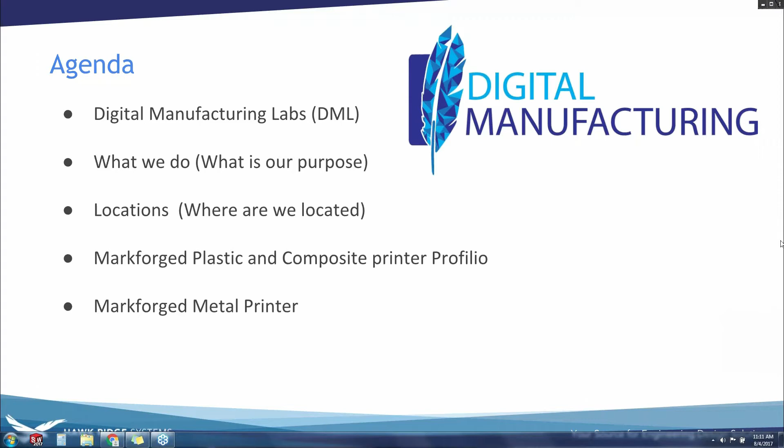Our first DML was established in 2014. It's in Santa Clara, about 4,000 square feet. The goal is to offer more than just software — the goal is to offer software and hardware and just to meet people's needs.

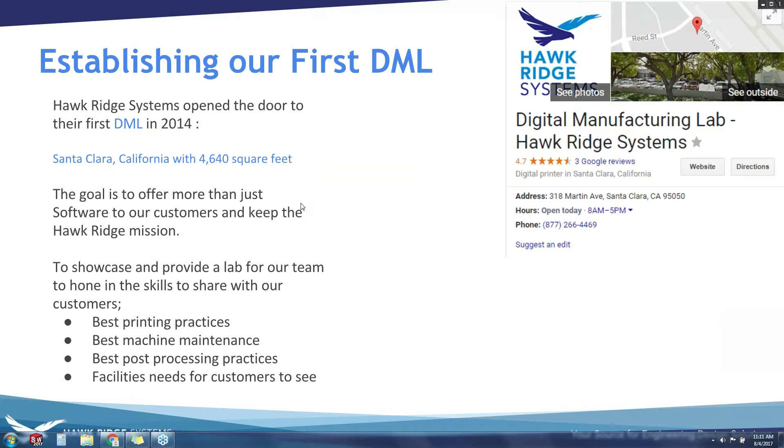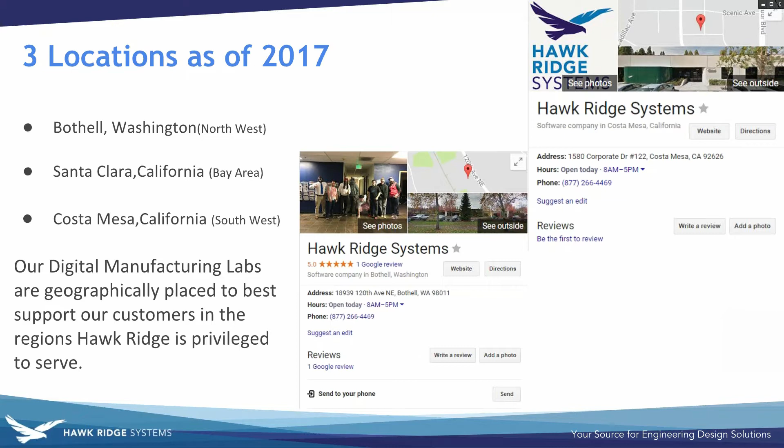Recently, we've also opened up 2 more locations, one in Bothell, Washington, and one down in Costa Mesa. This is just to better serve our clients.

So this year has been a very exciting year. What we can do now is we can actually offer new printers — this year we took on both Markforged and HP. This just gives us more printers, brings better opportunities to our customers, better ways to serve you guys.

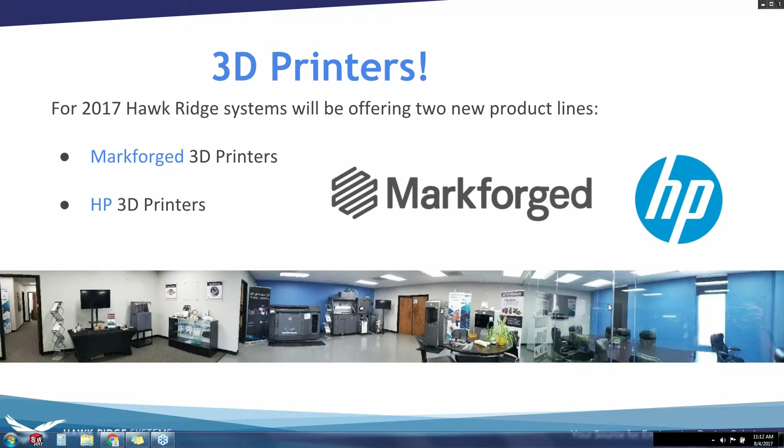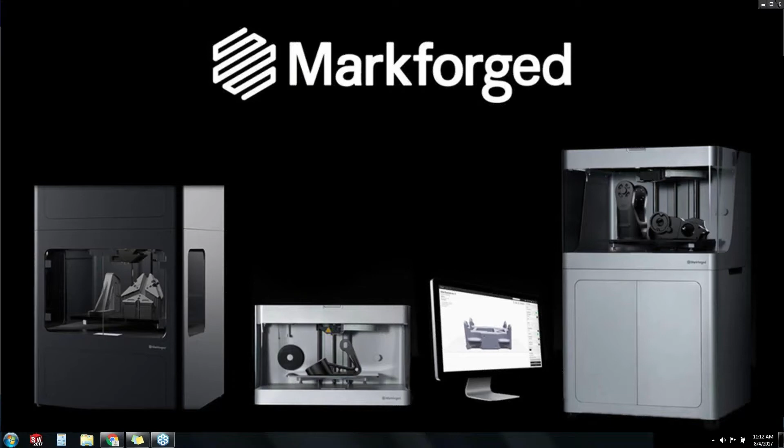So jumping into Markforged here. First we'll do a little bit of a history about Markforged.

So Markforged, the company founder, he was a MIT engineer. He is also very into motorcycle racing, so you'll notice some of the products he prints are motorcycle levers and stuff. He is from Cambridge, Massachusetts. His first printer came out in about 2014, and he used to be a machinist.

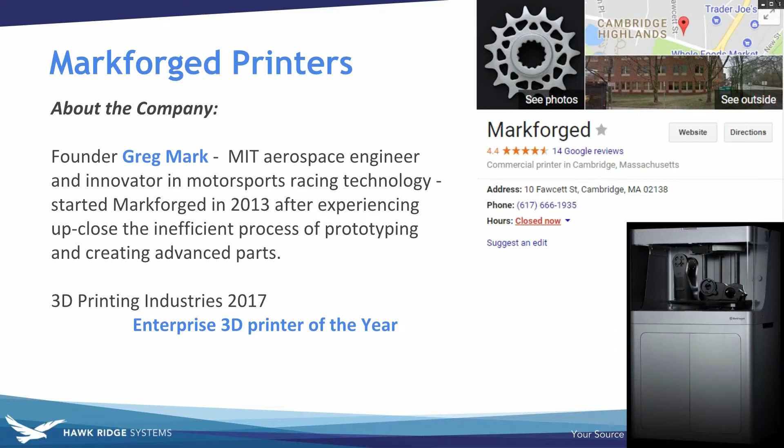So the first Markforged printer, in 2014, was actually launched at SolidWorks World, and what makes it unique is it could actually inlay carbon fiber. I'm going to be talking a lot about carbon fiber and trying to better show you the strength and how to quantify how much stronger these 3D printed parts are than typical 3D printed parts you get, or just injection molded plastic ABS parts.

In 2016, they introduced the Mark II, and then the Mark X in 2017 — 2 more printers, an Onyx Pro — and we're very excited that sometime later this year, the Metal X will be released. The Metal X will be the first metal printer that Markforged makes.

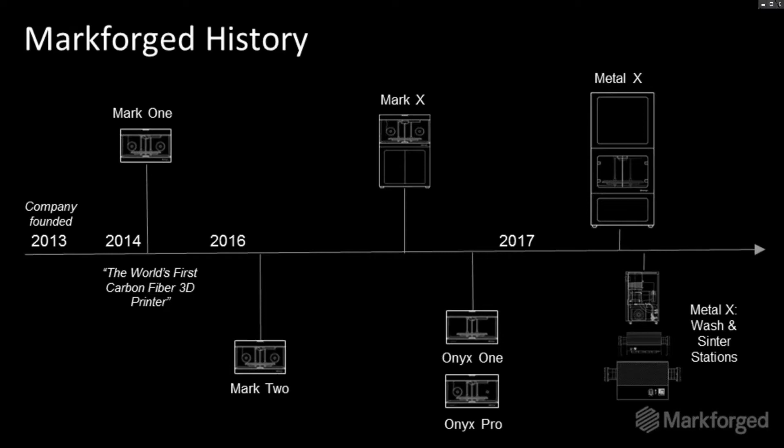So what this allows you to do is bring a better part at lower cost to the market faster. For prototyping too, it allows you to make mistakes faster. As an engineer or industrial designer, we all know we're going to make mistakes — the goal is to make them as quick as possible before we go to production. And so that's what these parts can do.

And with Markforged, we're no longer limited to just prototyping parts — these can be used as end-use parts, which is really, really exciting.

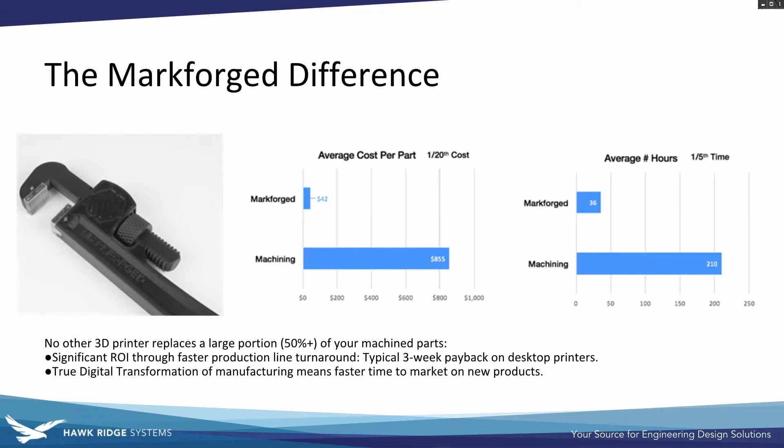So some of the differences between other competitors is, one, the ease of use. The unified cloud software that I'm going to show you later on in this webinar is terribly easy to use. It doesn't need to be installed on your computer — you just need to log on. You can see all of your files that you have ever printed. You can reprint them. You can reprint builds. You can share and add other people to your printing group.

So if your company is sharing 4 printers in the fleet, you can give access to different engineers, designers, and management, and they can all see what's printing, what has been printed, and different files that have been loaded. You can get print times, all very easily on the cloud. And it's not something that takes a long time to learn — this is about a day or so, and then you click through every single option, and you'll feel good and confident using the software.

The other really nice thing is just the precision and the quality of the parts. If you guys have ever used traditional FDM printers, you know the frustration of having to hit print and doing a prayer that the next day when you come in, it's finished — not just spaghetti. Well, with the Markforged printers, that's totally different.

You can have confidence that your part will be done and be done well when it's done printing. That's a big deal. It doesn't sound sexy, but it's really important. When you have a deadline, reliability is awesome.

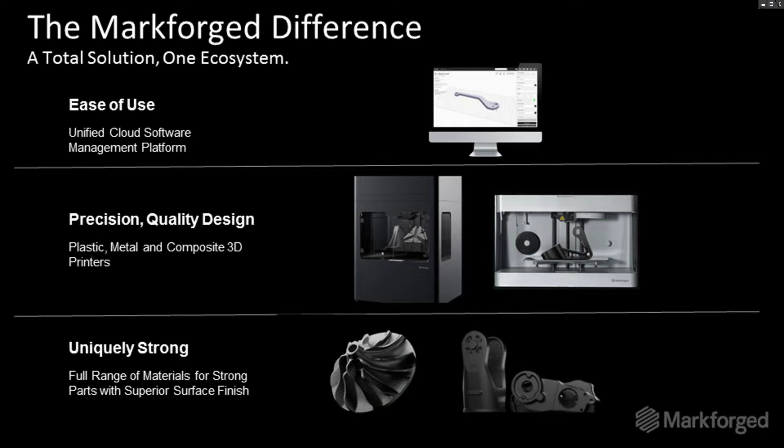And then, of course, now we're getting strong parts, and I'll have a lot of graphs to prove that they're strong. This is no longer just a visual model. This is a strong part that you can test with.

And then they've actually got a lot of awards for their great products. So it isn't just a product that was released and no one said anything about it. People have noticed what a great product this is. This is one of the first desktop printers that lives up to the hype and the dream of getting reliable prints off of a desktop printer. Before, not a lot of printers have been able to deliver on that promise or expectation, and Markforged is one of the companies that is doing this.

And here are some examples of what it's great for. I don't want to put any printer in a box and say this is only what it can do, but these are just some examples to get you excited and make you think outside the box. Tooling and fixtures is huge for Markforged. Many companies have found that instead of having to CNC out a tool or fixture, they can just 3D print that fixture on the printer so the CNC can keep running and cutting metal and making money, while the 3D printer is printing the cheap, easy fixtures.

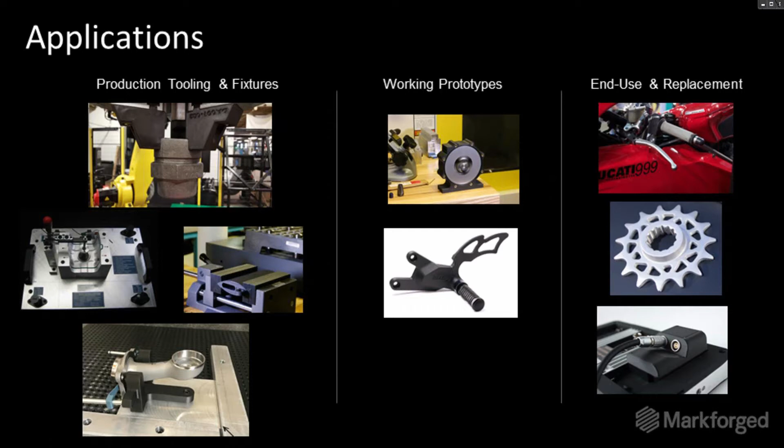Okay, so the lineup that Hawk Ridge is selling, these are the printers that we are selling. First is the desktop printer for anyone at any small company, even if you're just a home user. The Mark Two is the one that we'd like to talk about and bring to you. This is a prosumer printer, meaning the quality is wonderful, the prints are reliable, but it's affordable and you can put it on your desktop.

It's great for that. The next printer we'll talk about is the Mark X. This is when we jump up into the professional series printers. This one is made to be run more, has bigger build volume, has inspection, has all the carbon fiber materials. It's just for professionals. And then very, very soon, we're going to have the Metal X. This is for production, for making end-use parts. This is metal, and we're very excited for that one.

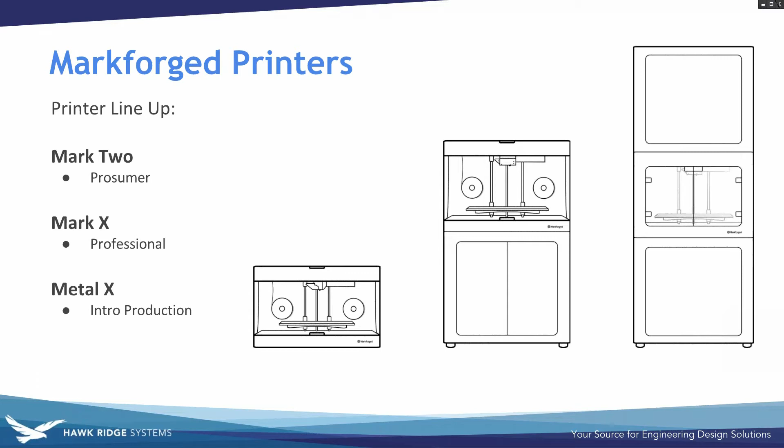Okay, plastic and composites. This section is all about the plastic and composite printers, the first two I talked about. All right, so this is one of many graphs that I'm going to show you. So what are we looking at here? We're looking at the strength of some different materials.

The first one is nylon, and we can see that it's not as strong as ABS. And then onyx. What the heck is onyx? Onyx is the material that Markforged prints with, that's their base material. Every plastic printer that Markforged prints is usually with onyx, sometimes they inlay carbon fiber or different material inside of it, but onyx is always going to be the outside material. And if we look at this graph, we know that it's stronger than ABS and it's stronger than nylon. So even if you're just printing with a base material, you know that you get a stable, strong material.

And how does it achieve this? It actually has chopped up carbon fiber strands within the onyx material. What's great about that is it reduces the amount of warping. If you've ever printed with ABS or nylon, one of the things you know is there's a high potential for long, flat things to warp, because of how much it changes shape when it expands and contracts. The onyx, because it has that chopped up carbon fiber, doesn't expand and contract as much, so it holds its strength a lot better. That gives you better looking parts, more reliable prints, and it's just a superior material.

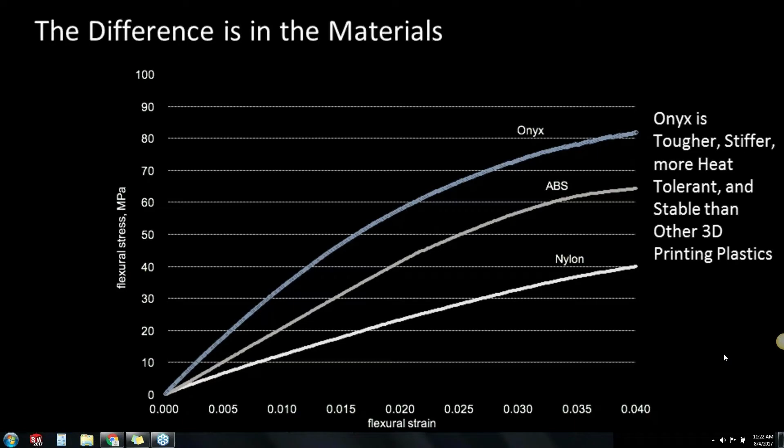Next graph. The other thing Markforged is known for is being able to put continuous fibers within the part. What does this mean? It means you can have an onyx part, and if it's big enough, you can inlay continuous strands of carbon fiber or fiberglass inside it.

Over here we have a picture of the actual part, and this would be a picture if we cut it in half so we could see the layers. You can actually see layers of the carbon fiber going across. This is a digital representation: the white lines represent the onyx material inside and around, and the blue lines represent the inlaid material, either carbon fiber, Kevlar, or fiberglass. So you can inlay different materials within your part, and that adds to the strength and makes it quite a bit stronger.

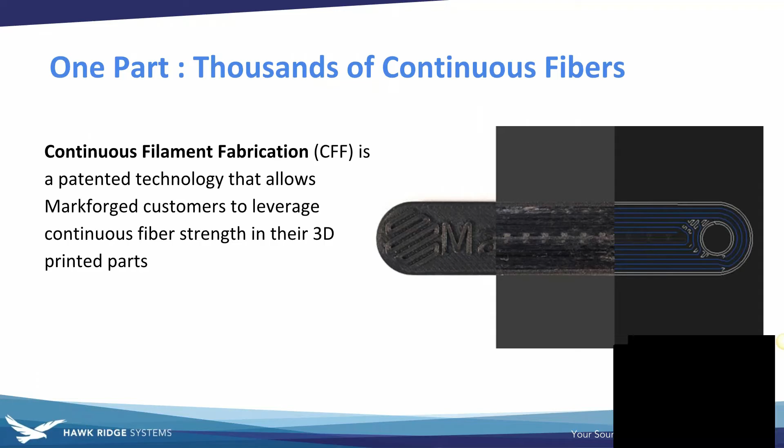How much stronger? Here's another graph that shows its strength. If you inlay with Kevlar, you can see the strength, and what's nice is it doesn't fail in a dramatic fashion—it starts to yield and then just goes off slightly. What would this be great for? Something that needs impact resistance. So if you're 3D printing a part for a rough environment that needs some flex but also needs to be strong, Kevlar would be a great choice.

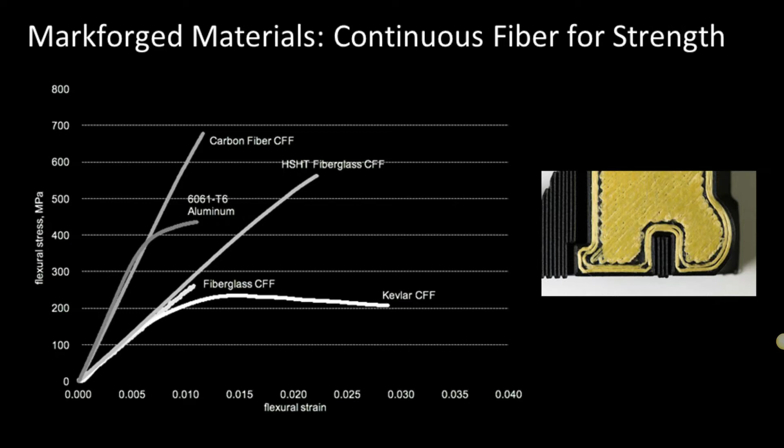But let's say you need something stiffer. You could go to fiberglass, and the CFF is a little bit stronger here. The next one is a high temperature fiberglass. Then we have carbon fiber inlaid, and if you notice, it is very close to the same strength as aluminum. What's amazing is that you can 3D print a part with almost the same strength as aluminum. That hasn't been possible before, and this gives the user a lot of ability to make stronger parts from a material and manufacturing method that didn't exist before. It gives you freedom to make really strong parts that you used to not be able to make.

So this is game changing for 3D printing. Before, we couldn't 3D print parts that were anywhere near this strong. And that means it can open up many different applications for these types of 3D printed parts.

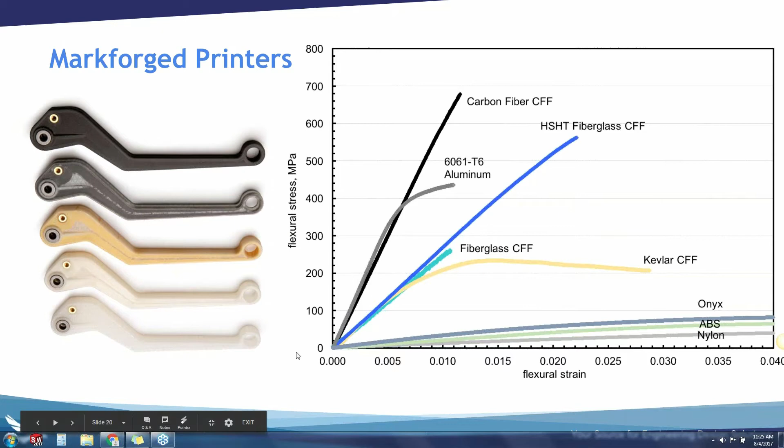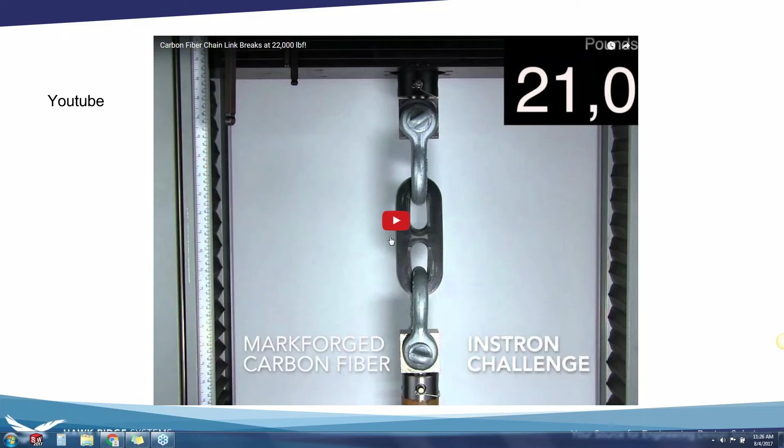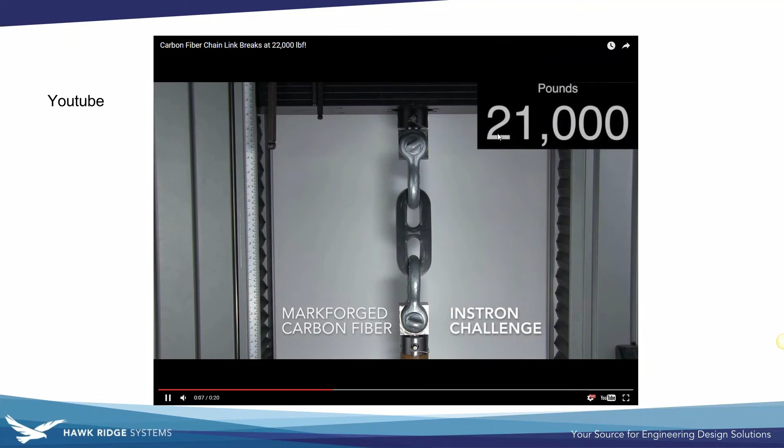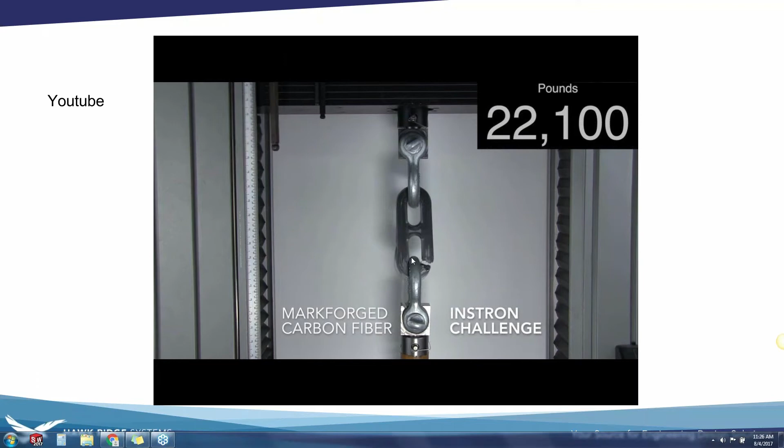Let's see if this actually plays here. The center part is a 3D printed part, and it's going to fail, but they're adding pounds to it, and it fails at about 22,000 pounds—that's how much force it can hold before it actually breaks. That's on a 3D printed part, which is pretty amazing. If we look up here at 21,000, 22,000 pounds, you can start seeing it deform a little bit. This one is inlaid with carbon fiber, and there it breaks, at 22,000 pounds. So that's really exciting—it shows you can make very, very strong parts.

So what type of printers can do this? The Mark II is the first one we're trying to sell here. The Mark II can offer the onyx material—you could just print in onyx, or print onyx with inlaid carbon fiber, inlaid fiberglass, inlaid Kevlar, or inlaid high temperature fiberglass. There's also a nylon option, which would take the place of the onyx material, so your base material could be either onyx or nylon. But again, onyx is a stronger, superior material, so really I don't see anyone using nylon any longer.

The next question is, okay, I like the size of this—it's a desktop printer, plugs into the wall, has Wi-Fi, that's great. How big can I print something? Your build volume is right here: you can print 320 by 132 by 154. That's your build volume.

Its resolution is 100 microns. Very nice, easy to set up, easy to live with, easy to print. It can sit on your desk, and it's reliable, very reliable.

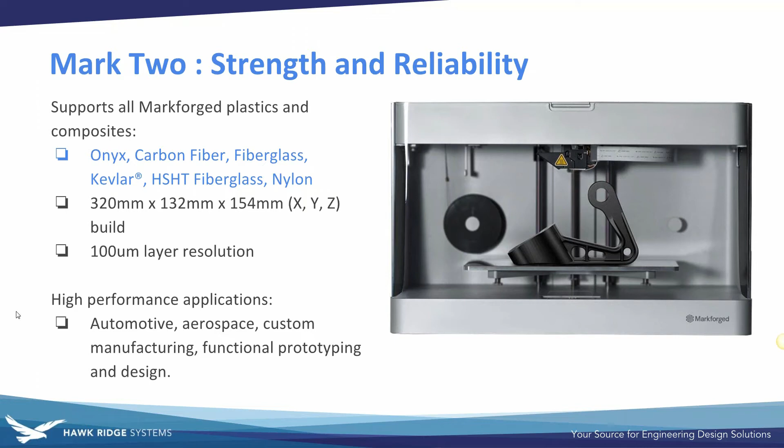The next printer that we sell is called the Mark X. This one is more for the professional user. The other one was that prosumer. This part is 330 by 250 by 200, so you get a much larger build volume, and that's great. A lot of people need to print larger parts.

It can print with all the same materials as the previous printer, the Mark II, but it has some other benefits. One is it prints at 50 microns, so it can print at 100 or 50, giving even finer layers for better resolution. You have this wonderful sheen when the part's finished because of that small resolution.

Now with this printer, it actually has a laser inspection. So what this means is you can set up different layers within the software to actually inspect the part to make sure it's within tolerance. You can say at layer 300, I want to do an inspection, and it'll capture what it's printing at that layer. Pretty unique function, really exciting to see how this is going to be used.

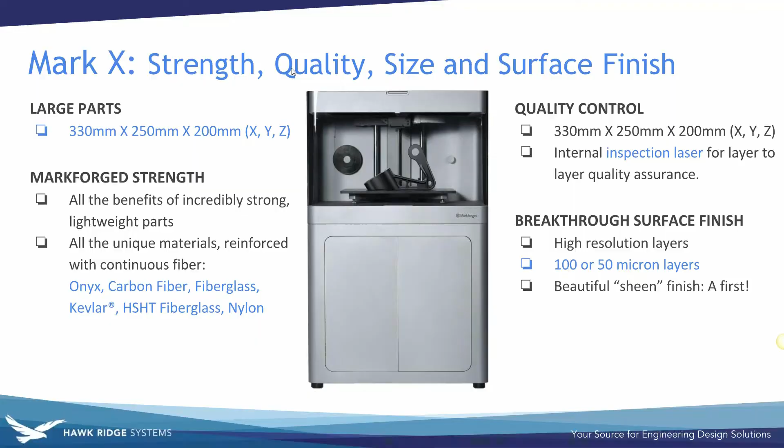It also has a webcam. So at any point, even if this printer is in Chicago, for example, and it's printing, if I have internet connection, I could log into the printer, take a screen cap, and see where it's at, see the print being printed, which is really quite interesting and quite fun to do. So those are the two composite printers that we're selling, the Mark II and the Mark X.

This is usually what everyone cares about, and that's understandable: metal. Metal's not released yet, but Markforged is going to release a metal printer later this year, and it's going to be very exciting.

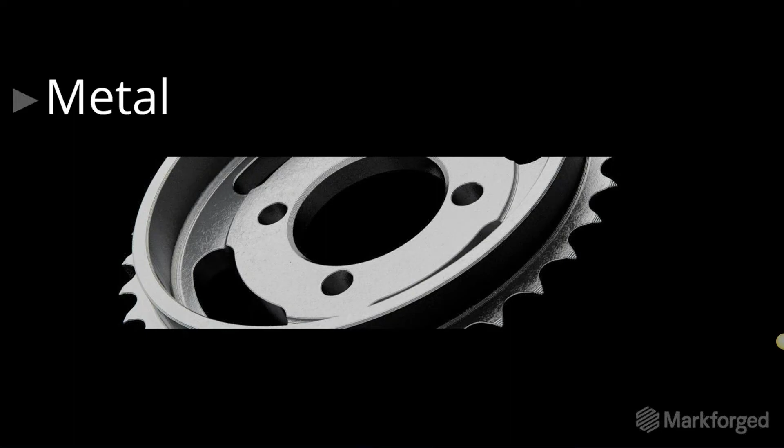This technology is called ADAM, short for Atomic Diffusion Additive Manufacturing. It's different than a lot of other technologies for metal. It doesn't use powdered metal in the traditional sense for 3D printing, and it doesn't have a high-powered laser either.

What it will do is actually print out like an FDM printer, the metal part in a green state, and then you have to put it in a furnace, and it will fuse the part together afterwards. So within the strands that it's printing, there's actually metal within it.

What's amazing about this is it's one of the first affordable solutions for professionals. These are going to start at under $120,000 for the printer, which is about 3 or 4 times cheaper than any other metal printer out there. Most metal printers are about $500,000, and you need things like nitrogen to suck out all the air. You need a huge room. They're messy, with powdered metal that can be dangerous.

So instead of all that, this is a new solution. This printer could actually be in an office or shop area, and you could be metal printing.

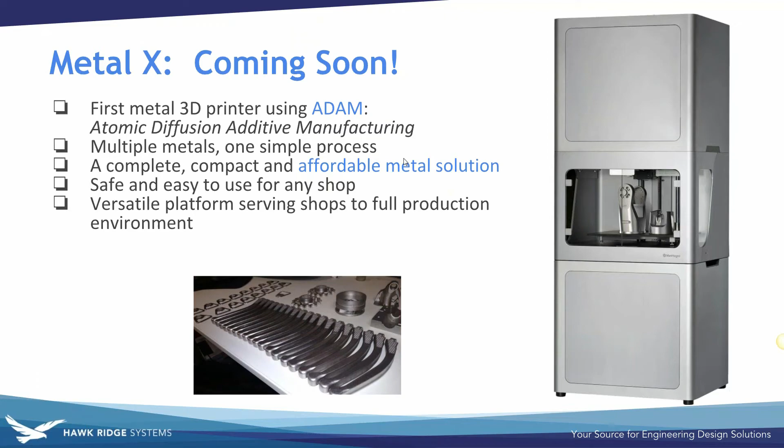Next is some pictures of what it can do. Again, the founder loves motorcycles, so we're going to see a lot of things from motorcycles like the sprocket and this brake lever. But these are dense metal parts that have been 3D printed.

What's amazing about that is that it allows you to make really light parts. You could have a very sparse fill pattern, 50% infill, or 25% infill, so the whole outside is still metal, but it'd still be a very light part.

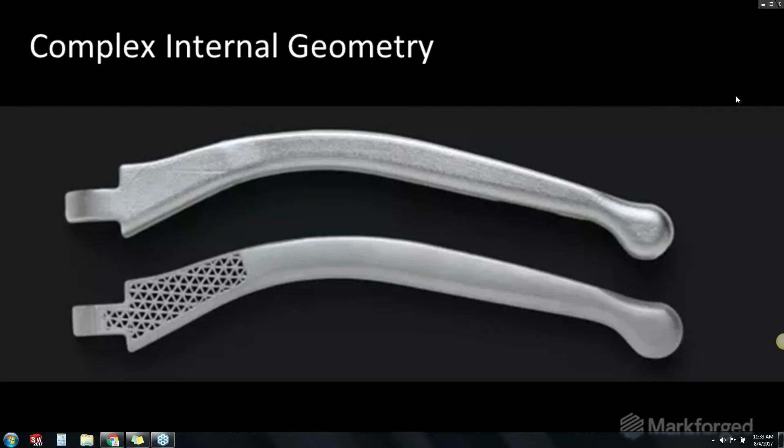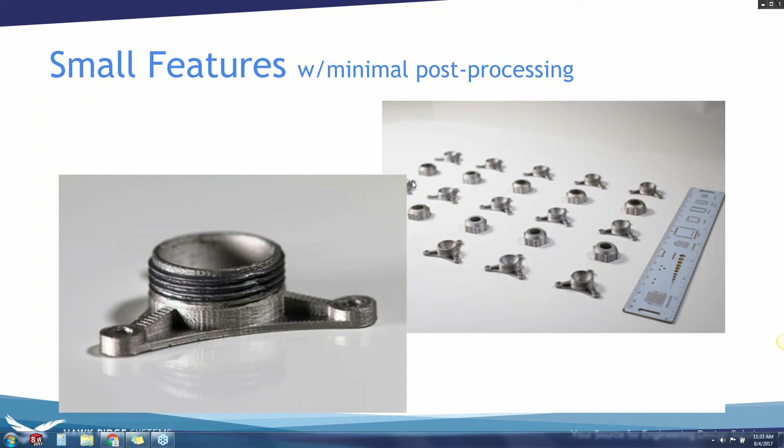To give you an example of how small you can print, these are all 3D metal printed parts. This example here is about an inch in its longest diameter, and it printed these threads. These threads did not need to be tapped afterwards—it was able to print them directly, which shows the accuracy this printer is going to deliver.

That's going to open up a lot of opportunities for different people with metal printing. Now, with metal printing, there is one thing to be aware of: post-processing. When it's done printing, you're going to need a washing station, something you'd put in a shop area, to wash off all the binder from the part, so you're left with just the metal part you want to sinter.

Markforged has also found two different sintering ovens that you could use. You'd buy one or the other based on the volume of parts you want to print and sinter—one for smaller parts, the Sinter-1, or if you're doing much larger parts, the Sinter-2. That's just nice; it gives you more options.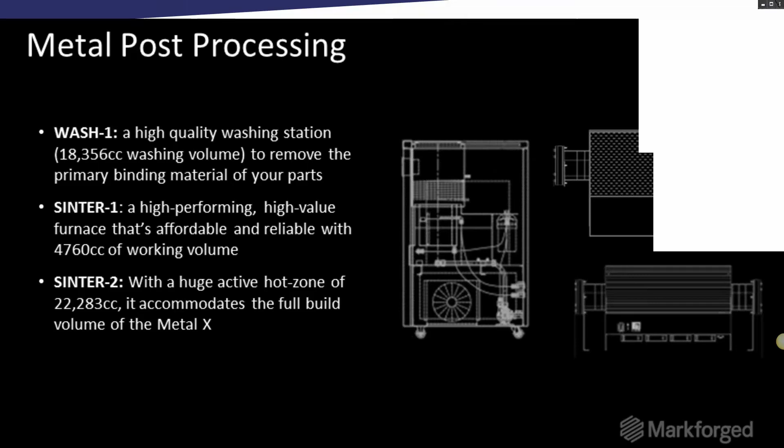And the tech specs—everyone always wants to know about the tech specs. Its build volume is about the same size as the Mark X, so 250 by 220 by 200. It can print down to 50 microns, and it's actually a very light printer, about 150 pounds. In the 3D printing world, metal printers usually run 5,000 to 20,000 pounds, so this is really amazing how light it is. That's going to make it easier to install, easier to move, easier to set up, and easier to ship.

That's all great. And the cartridges are bound powder, so you don't have to worry about powder floating all over. Metal powder is also very dangerous, but you don't have to worry about that—you have bound metal instead, so it shouldn't get messy everywhere.

The other thing to look at here is the materials offered. You have stainless steel—the 17-4 and the 316—both going to be released in the fall when the printer is released. They're also testing other materials coming out later, like aluminum, Inconel, tool steel, and even titanium. So once you get one printer, in the future you'll be able to print all these different materials.

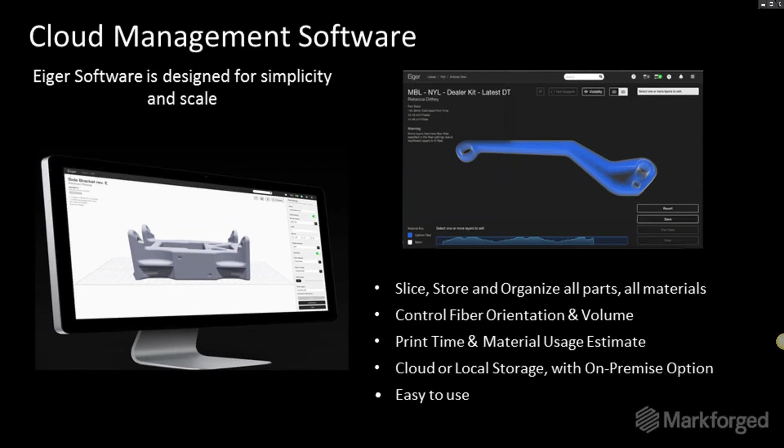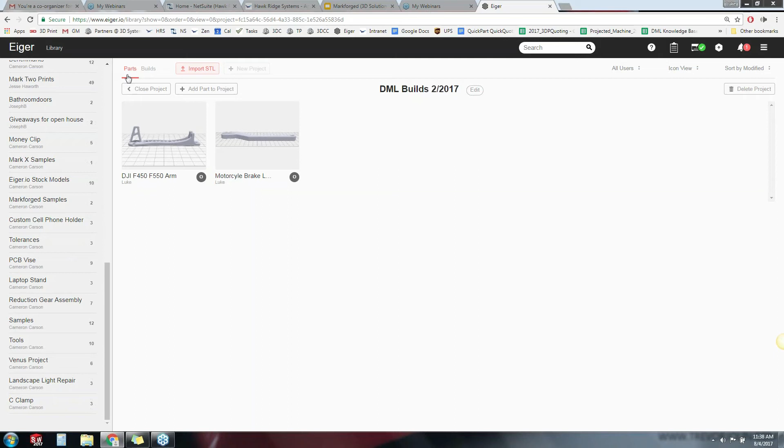Okay, so if I look on the left-hand side, I have different projects I could do—you can make different projects. I also have parts and builds. A part is something you bring in, like an STL. A build is the total build that you're going to print on—that's a build platform. When I click on a part here...

It'll load the part, and this is internet dependent, so if you're like me and trying to run a webinar at the same time, you may have a slight bit of lag depending on your connection. But if you're not doing multiple things at once, it loads up really fast. What can I see here? I can see the name of the part, that it's a clone from another user, and all the different revisions of this part, which is really nice. So if you have a part that's changed multiple times and you need to go back to revision 3 because that one fit better, or later revisions failed, you can revert back to these older revisions.

Very nice thing. Also, if I click here, look at this—this is wonderful. I know how much it's going to cost right now, and I know how much time it's going to take.

And I know the weight of this part. Really nice software - that's all on the left-hand side. On the right-hand side, I can see the name of the part.

I can choose from cloud slicing or desktop slicing. So if your internet speed isn't the fastest, you can switch over to slicing on your computer.

I can choose what printer to print it at. Right now Hawk Ridge has 2 printers hooked up to the internet. I could actually choose to print right now on the Mark Two, which I believe is up north, or I could print in Santa Clara with the Mark X. I'm in a different location, and I could send to these printers.

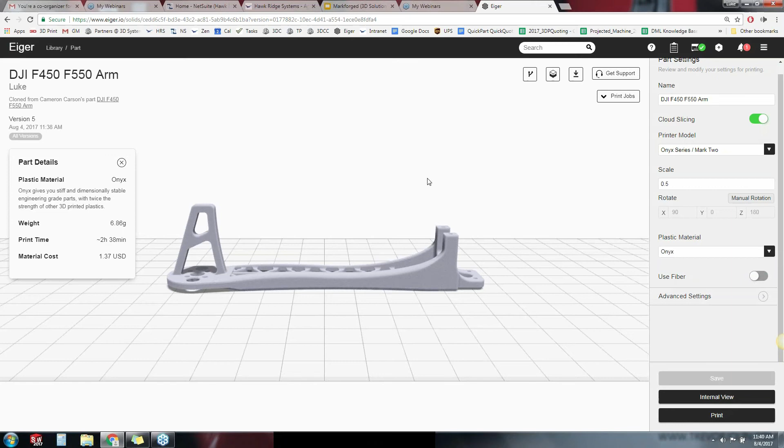Then what's next is I could choose to inlay some fiber. Now the part needs to be big enough, so let's look at this part. If it's not big enough, you can also choose where to print it. You can scale this thing up pretty easily here, so let's make this bigger. That's another nice feature - if it doesn't fit, it'll show you, it'll turn red. So it changes down to 1.2.

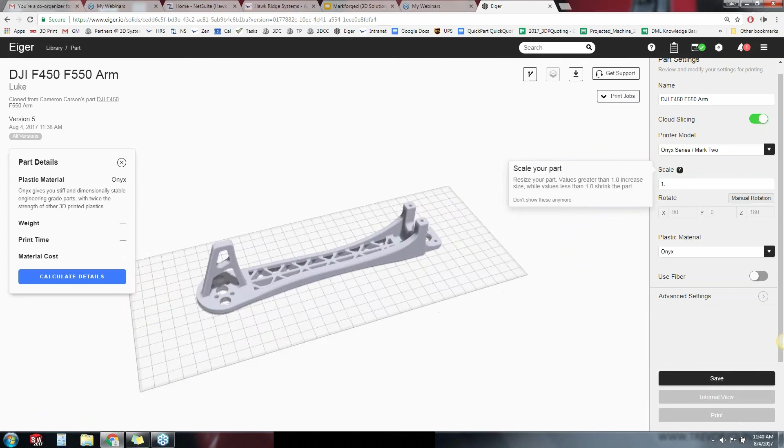Okay, so if I want to put in some fiber, I can add fiber now, and I can choose what type of fiber to inlay - carbon fiber, Kevlar, fiberglass, or that high temperature one. Say I want to do carbon fiber.

I can also choose the layers that I want to add in. With this part, obviously I can't fit 274 layers of carbon fiber. What it'll do is put as many layers as possible.

I can choose if I want isotropic or concentric fibers. It actually gives you this nice preview of the difference between them. And I would actually like concentric fibers.

Walls to reinforce - if I click on this one, you can see all walls, outer or just inner walls. And then concentric rings - how many rings should I have? Maybe I just need a couple, or maybe I want a lot. You can adjust all that, which is really nice.

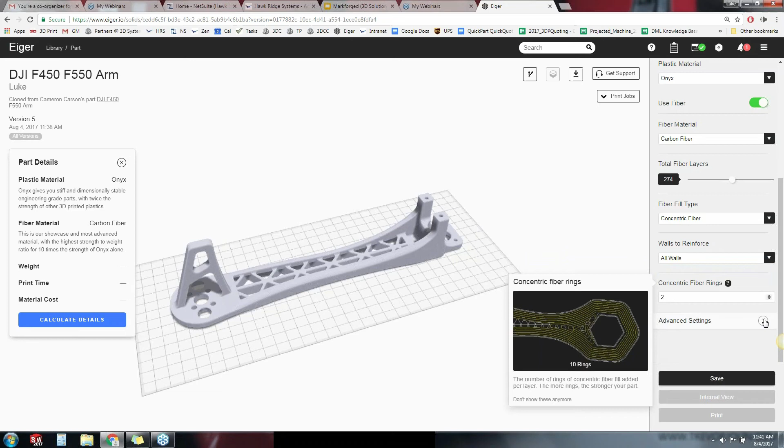Next, if I know this doesn't need supports, I could turn off supports. I could turn off the support angle. I could use a brim.

And then fill density - I could choose if I want this part to be less or more filled. Based on their testing, Markforged recommends these settings. They have not seen much strength increase with things over 50% infill, so I always just go with their default. And if I need to make something stronger, I just put more concentric fiber, and I don't adjust the infill very much.

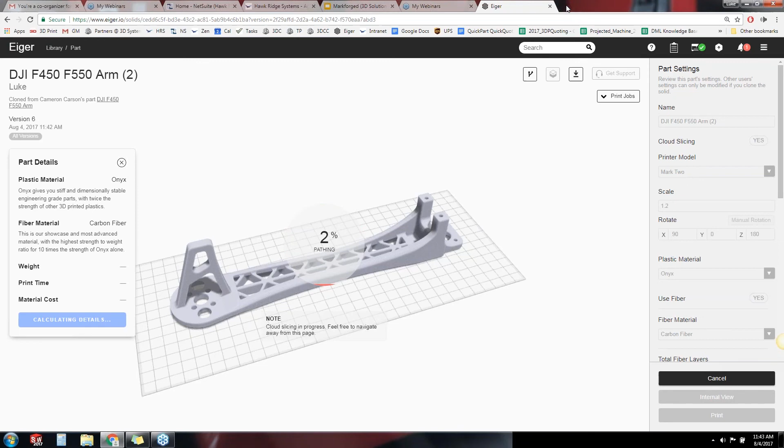So what does this do for me? I'll hit save, and we'll actually change the name - we'll call this 2. This is going to save the part, and it's going to upload it to the cloud as this new one.

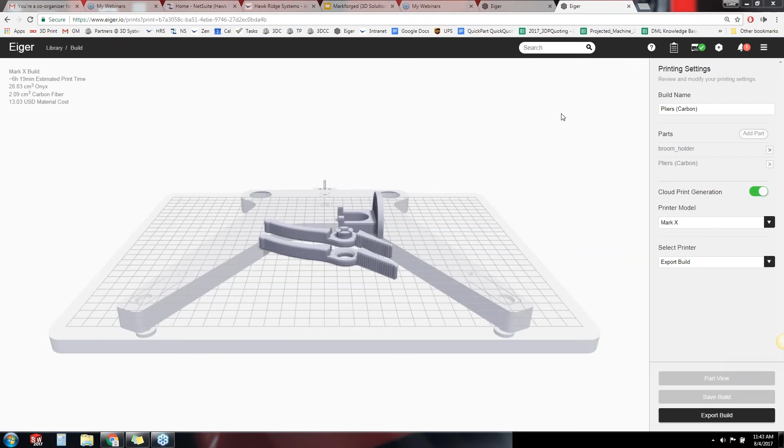It's also going to slice it. I'm doing cloud slicing while also doing a webinar, and you can see how quickly it's doing this - that's really nice as well. You can easily go and do something else while you're doing this.

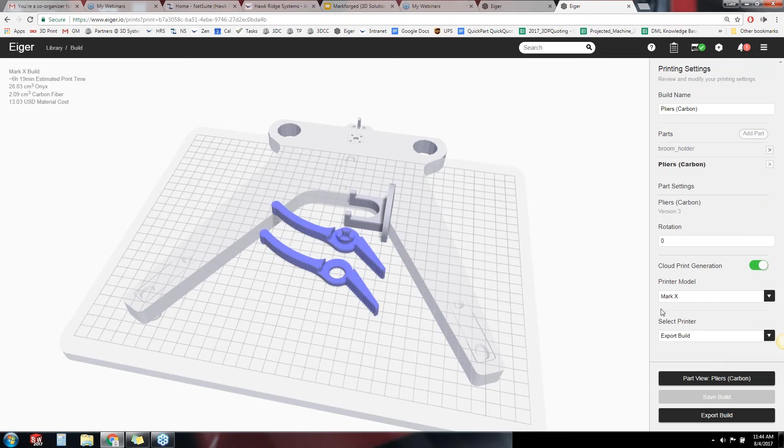Next, it's doing the pathing, so we'll be able to see the pathing after it makes it. If this is taking a while, I'm not stuck to this part - I can just open another tab, open another Eiger, and look at another part while that one's going. I can change even the users to just me, and look at a part that I've already done.

And this one's already on the build table - what do we see here? I can see that these are the pliers that I have printed. I printed on the Mark X, and I exported the build.

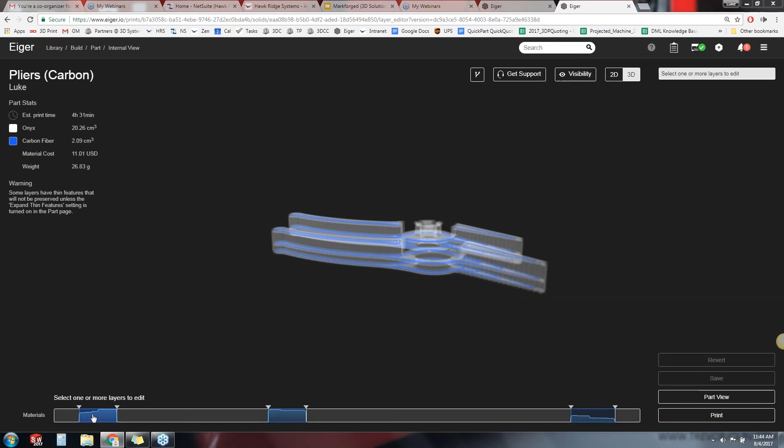So you have 2 options - you can send it wirelessly through the internet to the printer. Since I'm not located there, you could also export it to a USB drive, and you could walk that USB drive to the printer. So if you didn't have your printer on the network, or there's some network issues, no problem - you can just plug it in.

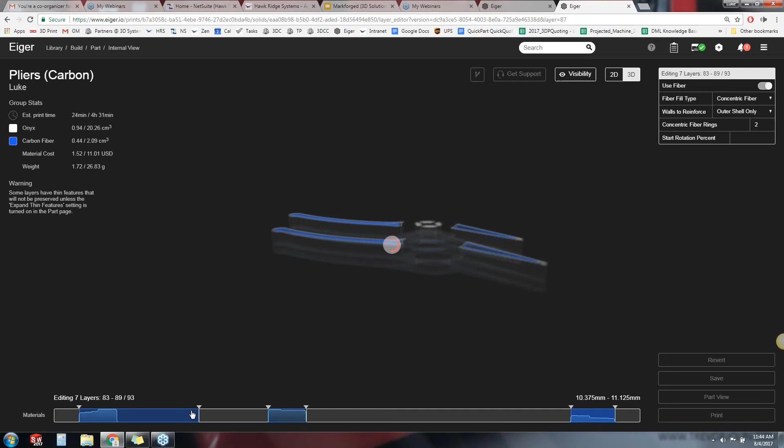Okay, let's look at these parts here. If I wanted to look at these parts, I can see how much they cost when I click on it, top left. And then I can also interrogate these parts.

So I see the cost, but there's also this really nice view called internal view. And what will this show me? So I can actually see how much onyx material I'm using and how much carbon fiber I'm inlaying.

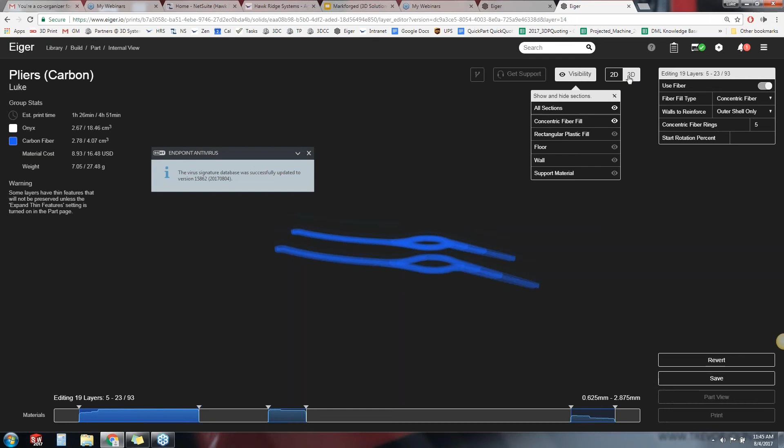So at the bottom, I can see that I have some carbon fiber here, and I'll just click there. And I see some more here and some more here. So this is just basically how many layers and where the carbon fiber is.

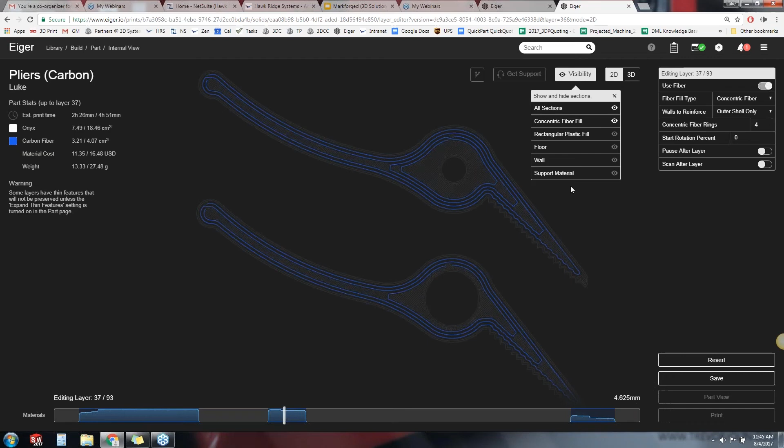If I wanted to change this, I could just slide this over, and you'll see that more carbon fiber will be laid. I could adjust the visibility of this too. All sections, just concentric rings. I could turn off the roof and floors. And I can just see all this stuff, all this detail.

I can see a 2D view or even a 3D view. So let's look at the 2D view. Now I can actually see the path of this.

I can click through here. So this is each layer. These layers here don't have the carbon fiber. When I get to the blue, I can see that carbon fiber.

I can make different groups. So if I wanted a group right here, for example, I could make a new group. So with that, use fiber.

So now I have a new group here, and I could say what type. Right now, the fiber, I could say isotropic, for example, or concentric. I could say the starting rotation, the angle, pause after this layer.

What is pause good for? Let's say that you wanted to insert a nut or bolt or something. As long as you design the part correctly, you can pause, put in a nut, epoxy that in, and then print on top of it. You just have to make sure that the print head would not hit that bolt. So if you make an extrusion into the part, you design your part correctly, you can pause it. That's no problem. That's really cool.

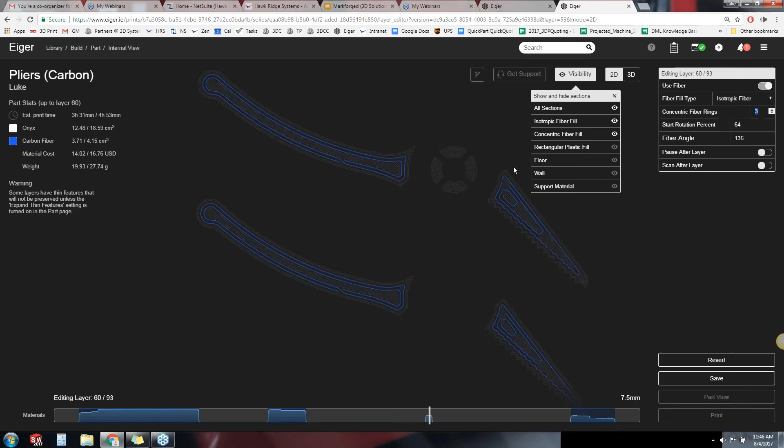If using the X printer, you can say scan after layer, and I could choose it to scan this layer. Use fiber, you could turn that on and off. So there's all these really nice options here. You can choose how many rings even.

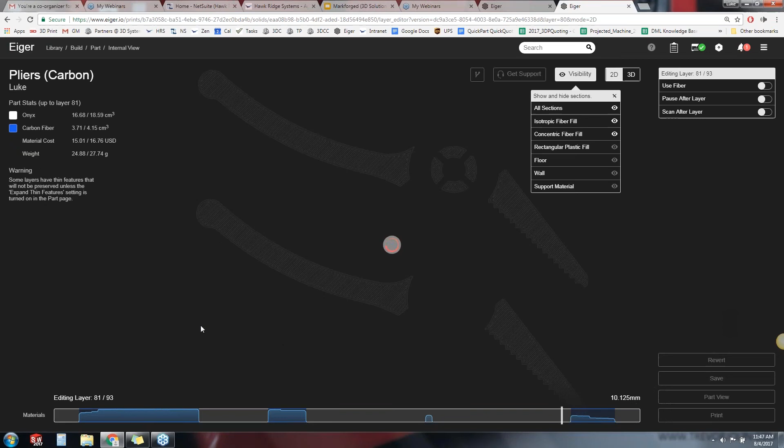So let's add some more rings. You'll see what it does. And I'll try to fill in as much as possible. And then as I scroll through here, I have all this wonderful detail. So it's just really nice to have all this as an engineer or as a designer, have all this freedom to make your part as strong as possible.

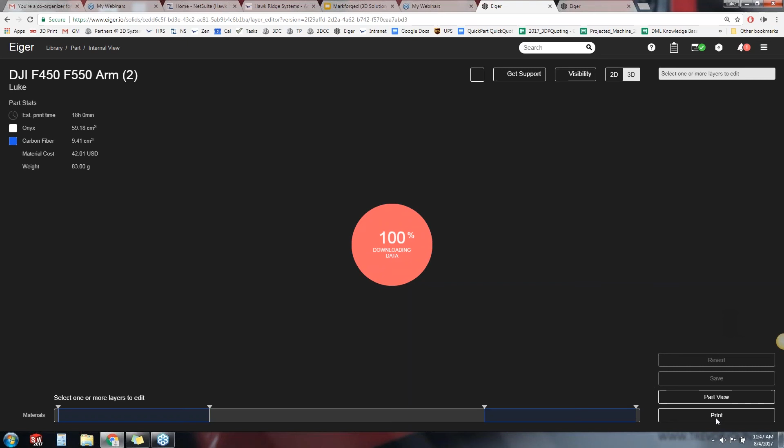Where you want to make it strong, how to reinforce it. And then you have some really strong parts, almost to the strength of aluminum. And then when you're done, you can hit save, and then this one will start processing. I could go back to that other Eiger one, and here's my part.

And I could go into the internal view of this one, and I could adjust all these things. And when I'm ready, I can send it to the printer. And then I have two views. I could actually just say print, and I could put it into the printer.

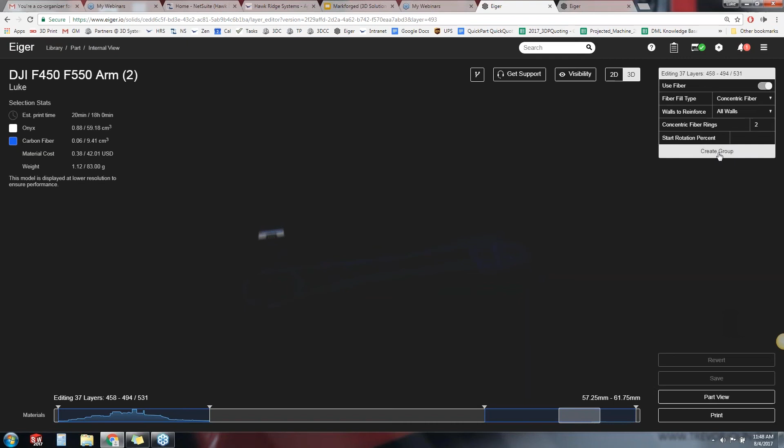When I'm looking at this, I can see that this here, that's not really going to add too much strength, this whole section here, not really anything. So I could actually turn off fiber there because I don't need any of this fiber here. I could create a new group and turn this on or off. And over here, I can see that this is actually going to add some strength.

It's just 2D, so you can see this. So it's adding a layer around the part. Hit print, put on the build, and then I'll show you, I'll send it to a printer.

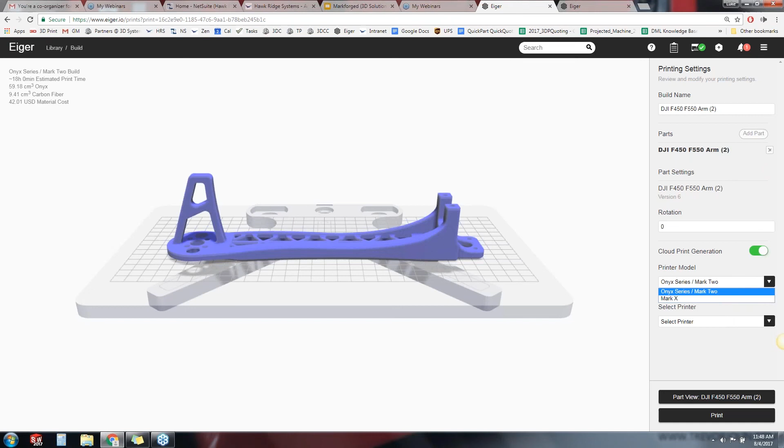So I'm going to choose the Mark X. This is in Santa Clara. I happen to not be there. I can remotely send this and hit print, and it lets me know details about this.

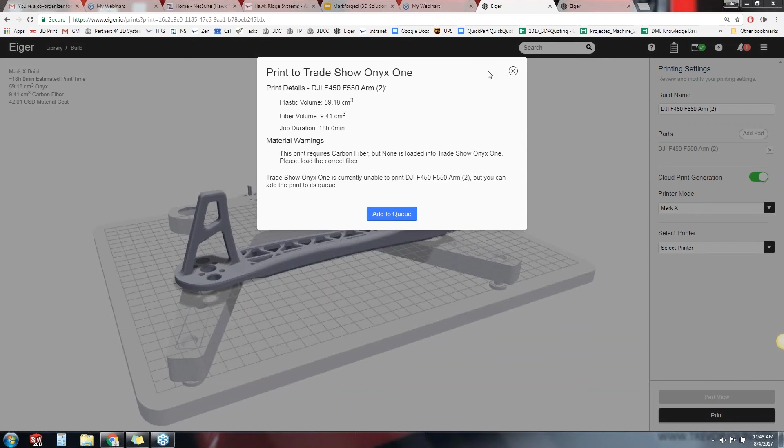Warning, requires carbon fiber, it's not loaded. I could still add it to the queue. Select printer. There we go. Even let me know it was busy, but print.

So now it's letting me know the plastic volume, the fiber volume, and I can add it to the queue since it's actually printing.

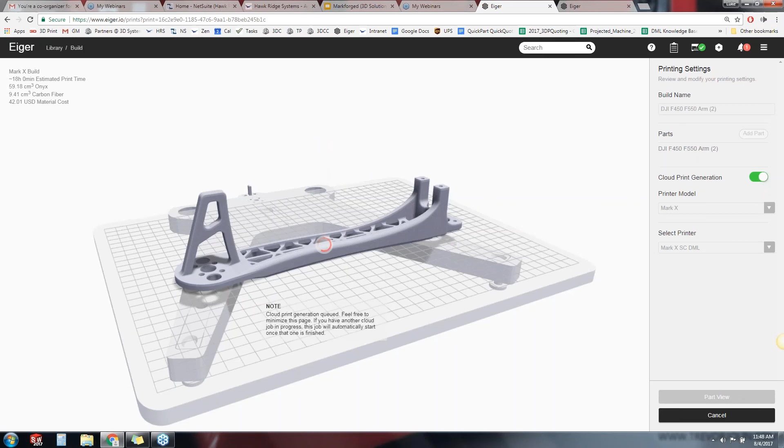And here I can see all the different printers, and I can see what they're doing. So we have the trade show printer. Here's some details about the trade show printer.

Another thing that's really nice is you can actually rate your parts. So when you're rating the parts, what that lets Markforged know is how well they're doing, the success rate of this printer. And it'll let them know if maybe there's a problem with your printer.

What this one is really nice is I can also see what I printed, onyx and carbon fiber, or just onyx. Here I can see there's an image of it too as well. So there's an image. It looks like it was done at night because I can't really see the print. And you can see that all of these parts, the time, the success rate, it's really nice software.

Okay, let's go back to the PowerPoint. So that's the part of the software. It's really easy. It takes about a day to learn, and then you'll be an expert at it.

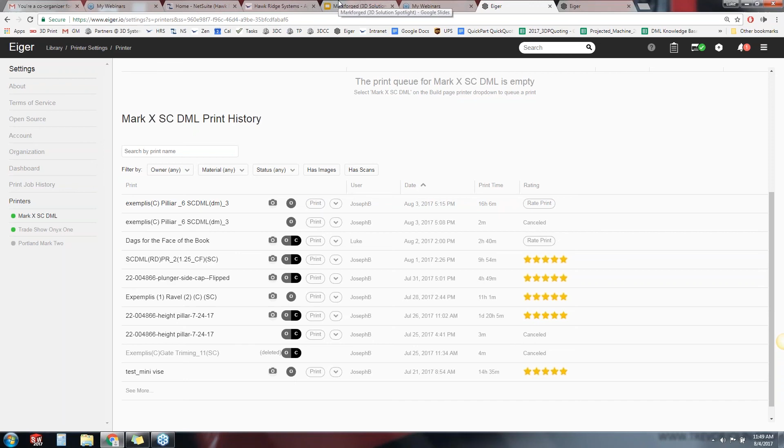There's another thing that Markforged offers that is quite unique. I haven't seen this with 3D printing, but it's success plans. Imagine your iPhone, you have this really nice iPhone, and a lot of people buy the insurance for it, the accidental insurance. That's what this is, just like accidental insurance to keep it safe. If anything happens, you can get these success plans, and if anything happens to the printer, you can choose 1 year or 3 year plans. If anything breaks, they will go out and fix it for you.

They'll send you parts and instructions on how to change out something. You can get priority support, and there's engineers on staff to help you. So Markforged does not just sell you a printer and run. They want to form a representation, a relationship with you, so that you will print and continue printing. A lot of people that buy Markforged printers, within a year or two, buy another one because they learn how much this helps their business.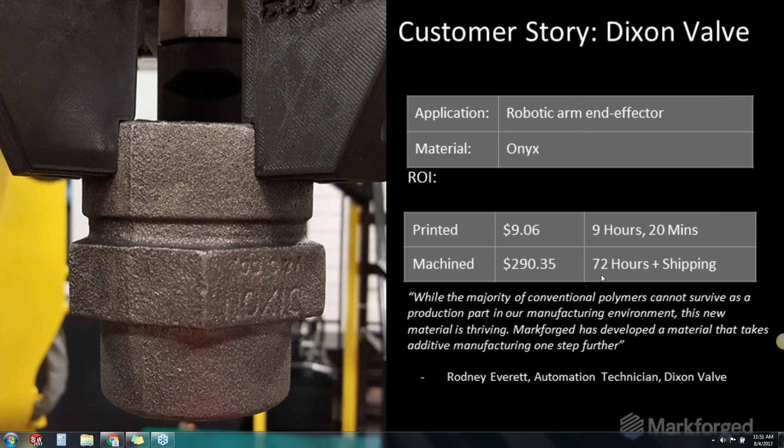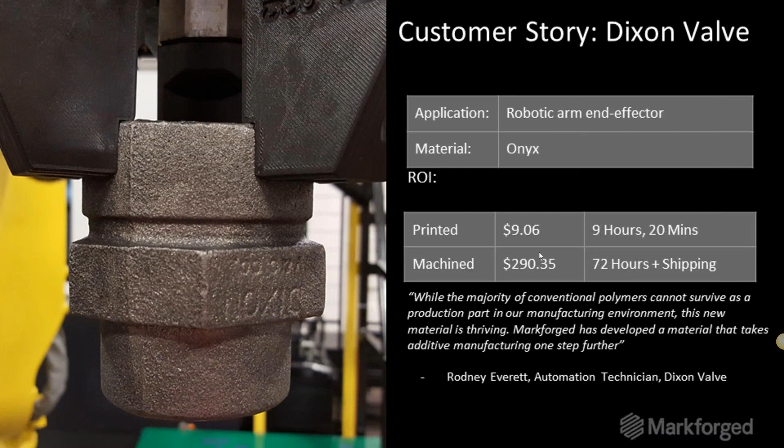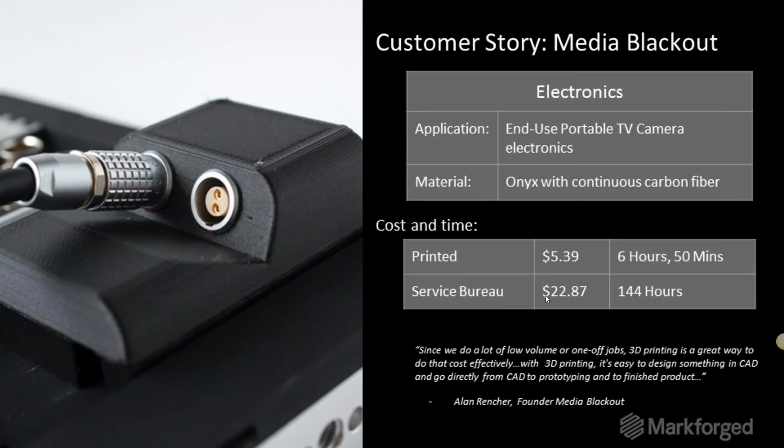This is a really good one, it's a TV show, you can actually Google this one and see it. They take a 3D printed part and take a hammer to it and try to break it. There's a whole TV show and episode about this, and that's really cool.

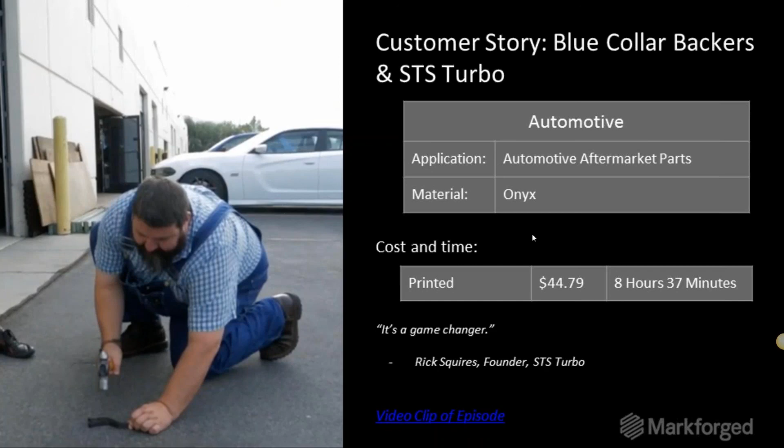This one is for an RC car. So we can see how much it would cost to print this, or to have a machine shop print out this upright here.

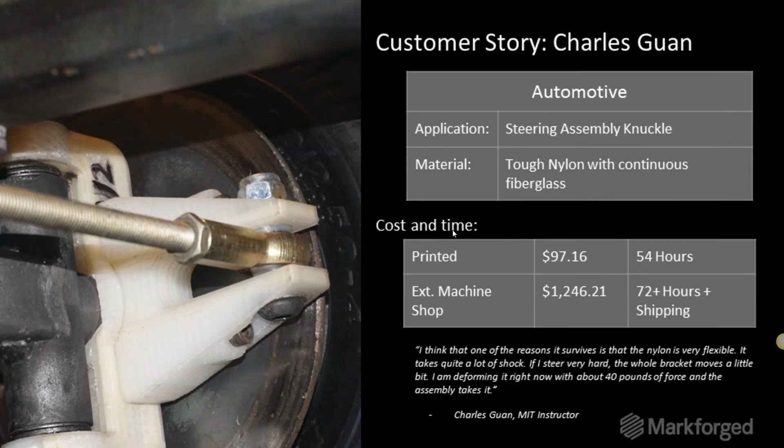Here's another one, this is for stamping. They're stamping out these green parts here. To print this would cost $15. To machine out the same part costs 10 times more and almost 10 times the amount of hours too. So quite a big difference.

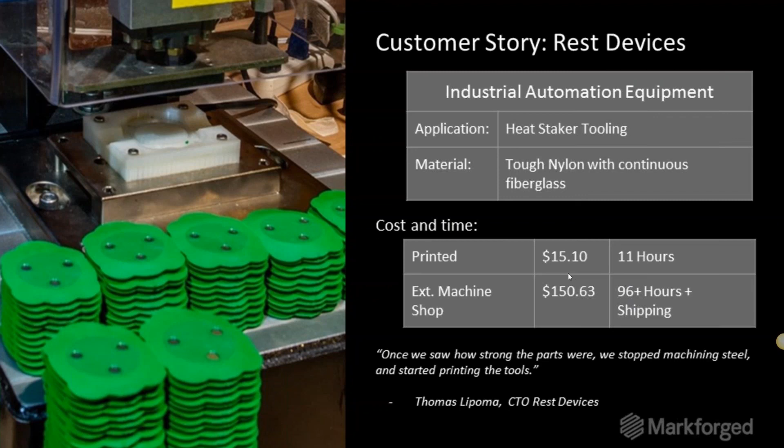Another one here. So you can see quite a bit of customer stories that Markforged has on their website, just to help show you, make you feel more comfortable that yes, this is a good investment, yes it will pay for itself, and yes, there's people using it successfully within manufacturing. Geez, I got a lot of them.